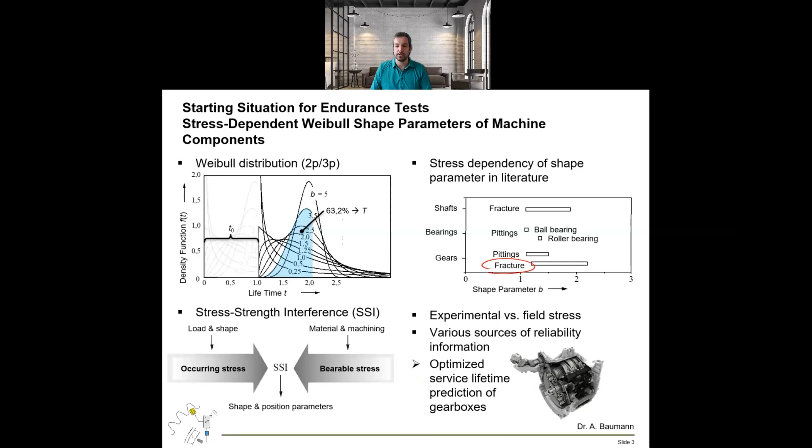With the help of our investigation, you are able to apply a shape parameter which is stress dependent, and the lifetime prediction of your gearbox is optimized. Here you can see the used hardware-in-the-loop test rig and the tested spur gear pair. First of all, we have on the input side a drive motor which is connected to the test transmission via a torsionally stiff coupling. The transmission output shaft is connected to the brake motor, which applies the load to the gear.

In the photo, you can see here in the middle the single-stage transmission, which consists of a single-stage spur gear pair. The transmission input side is connected to the drive motor and the output shaft is connected to the brake motor. On the transmission input side, we have an incremental encoder to evaluate the speed of the input shaft. The whole setup is placed on a machine frame which is isolated via air suspension elements to the environment. The electric converters here in the background are used for control of the drive and the brake motor.

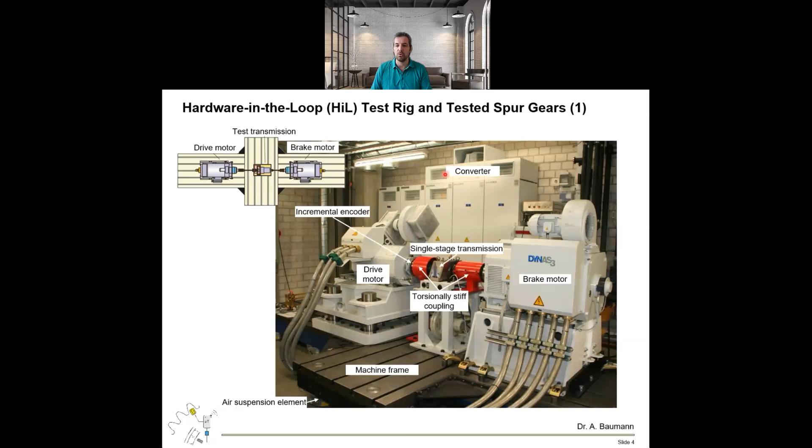In this picture you can see the tested spur gear pair. It's a helical gear which is commonly used in vehicle transmissions. The material is a 20MnCr5, which is also a commonly used material in automotive gearbox design. The fatigue strength torque of this gear pair is calculated with 450 Newton meters.

In our investigations, we applied a speed on the drive spur gear, which is located on the transmission input shaft. On the transmission output shaft, we have the driven spur gear, which is additionally shot peened to control the fracture on the drive spur gear.

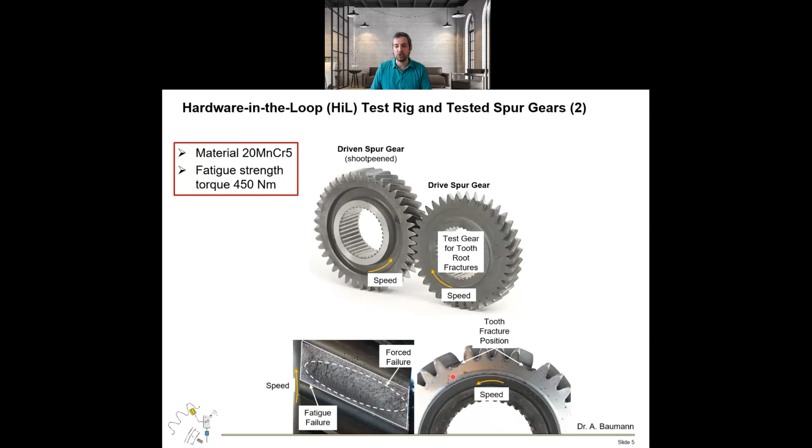On the downside of this slide, you can see a photograph of the fracture surface. The surface can be divided into two parts. First, we have the fatigue failure part of the crack, and in the middle you can see the so-called forced failure of the crack surface. In this picture you can see that there are two fracture positions, which shows that the load on each gear tooth is equally the same in each test.

Now I will come to the test results which we obtained in the lifetime testing. First of all, we defined three different load levels above the fatigue strength torque of 450 Newton meters, which are 470, 500 and 530 Newton meters. On each load level, we tested 10 specimens for a high confidence level of the life cycle data.

Additionally, we added a torsional vibration to simulate the behavior of an internal combustion engine, whose speed is not constant; it is vibrating within a certain range of amplitude. In this case, we used plus minus 10%, plus minus 20%, and plus minus 30% on top of the constant load.

When you see here the life cycle data, first of all, when we raise the load, the life data overall is decreasing, which is obvious. When we additionally apply a torsional vibration to the load, the life cycle data is further reduced due to the higher load.

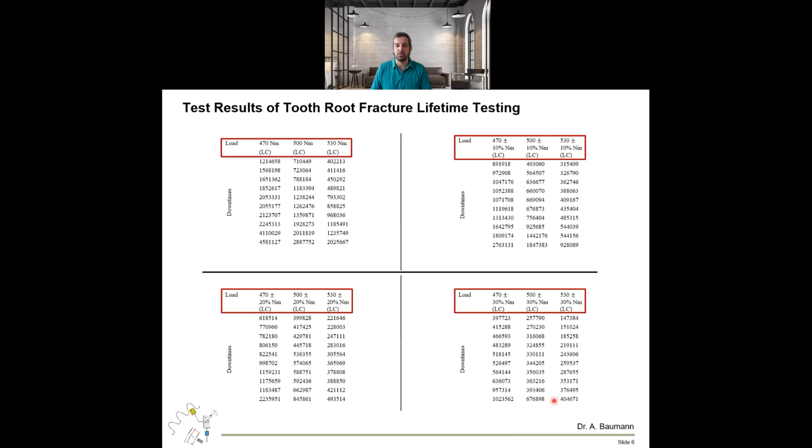We've chosen a three-parametric Weibull distribution since fatigue failure is a matter of failure-free time, and it's commonly used. The regression analysis is used for calculating the Weibull slope, and a 90% confidence bound is applied to the data.

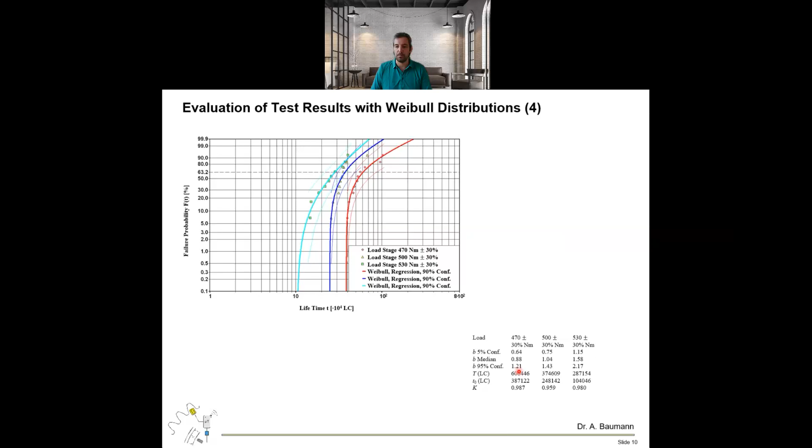Next, we see here the load level plus minus 20%. The failure-free time is further decreasing, and in this case the shape parameter b in median is around 1.1 with one exception, 0.9, but we can state it is almost constant in this load case. With the highest torsional vibration, plus minus 30%, we have a further reduction of the failure-free time. And in this case, the shape parameter b of the Weibull distribution is rising with rising load in the torsional vibration area of 30%, from 0.9 to 1.6.

To evaluate and come to a conclusion via application of a stress-dependent Weibull parameter, we have chosen this graphic. What you can see here is the characteristic lifetime T minus t0 on the x-axis and the shape parameter b on the y-axis. For each load level, we added a circle representing the 95% confidence bound of the shape parameter b, which means when we have a small radius, there is a small spread in the shape parameter b, and when we have a large radius, the confidence bound is quite high.

What you can see here, when we have no vibration load, plus minus 0%, the load levels are in distinct areas of the shape parameter b, which is here around 0.5, 0.6, up to 1.0 and 1.3. When we add torsional vibration to the load, the shape parameter is concentrating in the range of 1.2 down to 0.8, and the spread of the shape parameter b is quite high. One exception in this case is the highest load level, 530 Newton meters and 30% torsional vibration. In this case, we have the highest shape parameter b with the highest 95% confidence bounds.

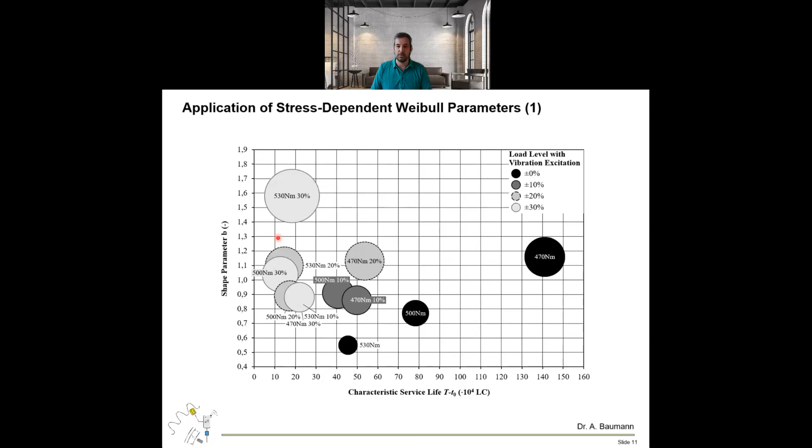Another display of the behavior of the shape parameter can be seen here. On the x-axis, we have the load level with increasing vibration excitation and the corresponding shape parameter b. In the middle, there is the median of the shape parameter b within its 90% confidence bounds.

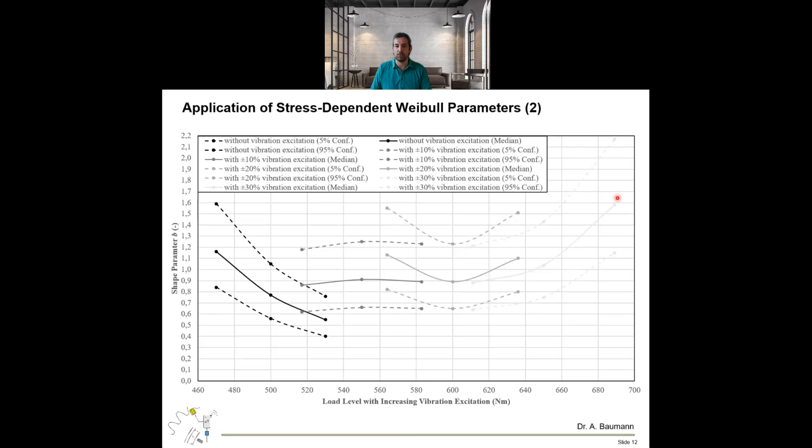In the case of 0% torsional vibration, the shape parameter b is decreasing with rising load. When we come into the range of 10 and 20% vibration, the shape parameter b is almost constant with a value between 0.9 and 1.2. And when we look at the torsional vibration plus minus 30%, we have a sharp rise of the shape parameter up to 1.6 within its 90% confidence bounds.

Okay, to sum up, you've seen the shape parameters of the test data on different load levels are clearly stress dependent. And the behavior of the shape parameter can be described as follows. First, the shape parameter decreases with increasing load in the high cycle fatigue area without vibration excitation. And the shape parameter b remains constant or increases with increasing load in the low cycle fatigue area with vibration excitation. The consideration of a stress-dependent shape parameter leads to a more reliable prediction of the gearbox lifetime.